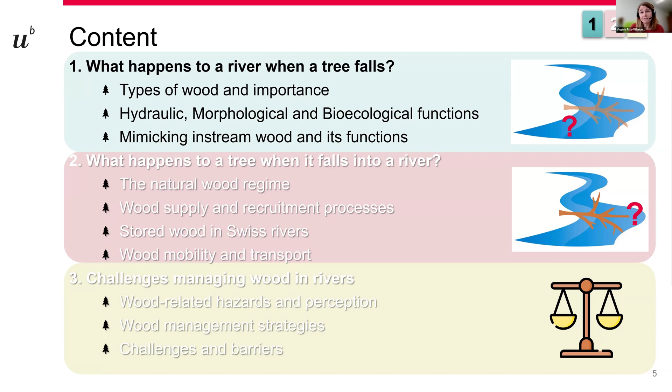Let's start with the first question: what happens to the rivers? Before I start describing the effects of wood in rivers, I was positively surprised by the responses to the first question of the questionnaire. We asked you to picture a river and whether it had wood in it or not. Most of those who responded—by the time I prepared this presentation it was 84 people, though I know more people responded afterwards, so we will update the responses—in any case, most of you pictured rivers with wood.

It was also interesting to see that most of you agreed on the statement that rivers with wood are more natural than rivers without wood.

I was surprised because when you search for 'river' on the internet, all the pictures that appear, or most of them, completely lack wood. So wood is absolutely absent from the general picture of rivers, and the same happens if you search for mountain rivers. Nowadays we need to ask also the artificial intelligence, and again, if you ask it to design a picture of a river, it's really hard to get images of rivers with wood. You really need to be very specific about what you mean by a river with wood—by default, rivers do not have any wood.

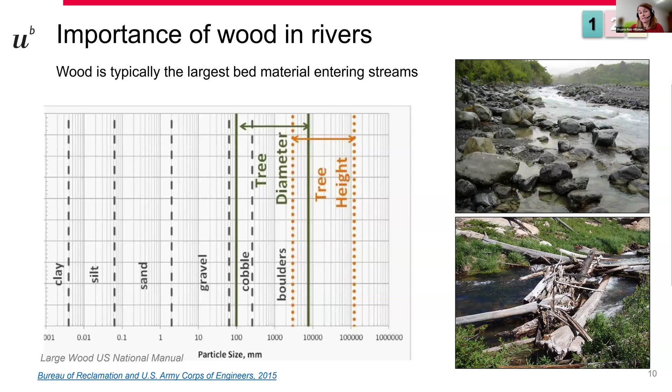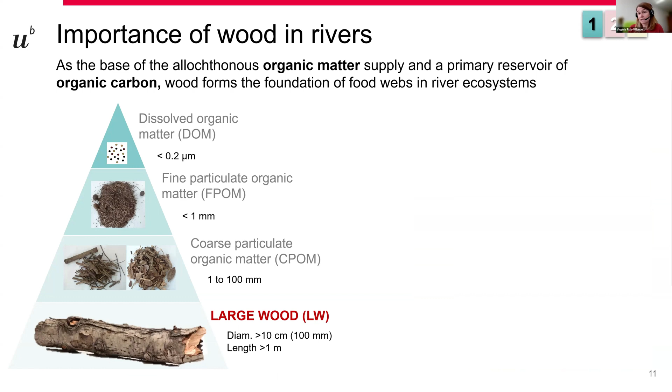Wood is typically the largest material entering rivers, usually larger than the coarse sediment, even boulders, especially when the wood accumulates into jams. In addition, wood is an important element because it's the base of the organic matter pyramid in aquatic ecosystems, and it's also a very important reservoir of organic carbon. Together with living trees, wood stores organic carbon, and this is the foundation of the food web in river ecosystems.

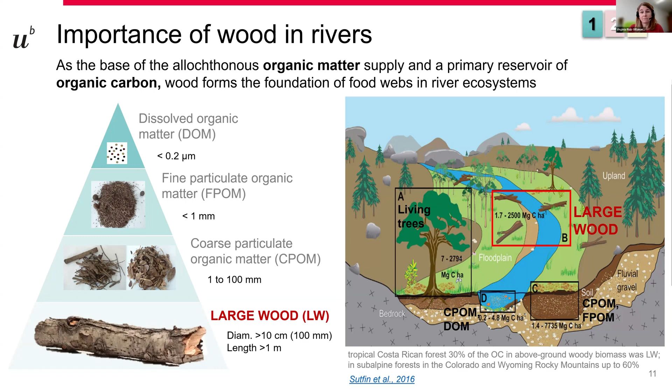Wood provides multiple functions and services across temporal and spatial scales. The local effects at the in-channel scale drive river reach pattern changes, and these changes influence river processes at the catchment scale. So wood influences river hydrology, geomorphology, and ecology.

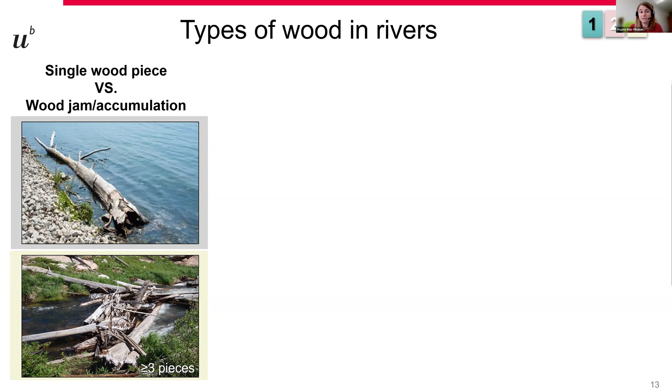We also need to distinguish the effect of wood depending on its size or type. Here we can distinguish between single wood pieces, single elements, and wood jams or wood accumulations, and also whether these accumulations span the whole channel or accumulate on one side—channel-spanning versus non-spanning wood accumulations.

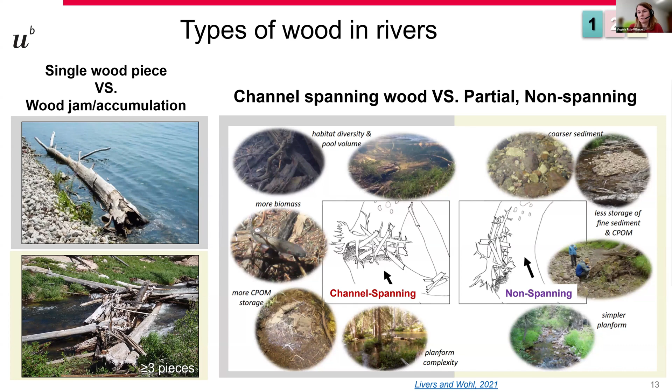We need also to distinguish between stationary wood and mobile wood, and this depends on the time that the wood remains stable in the river. Most research on wood has focused only or mostly on stationary wood, and it's only recently that the benefits of mobile wood have been described. I will go back to this later.

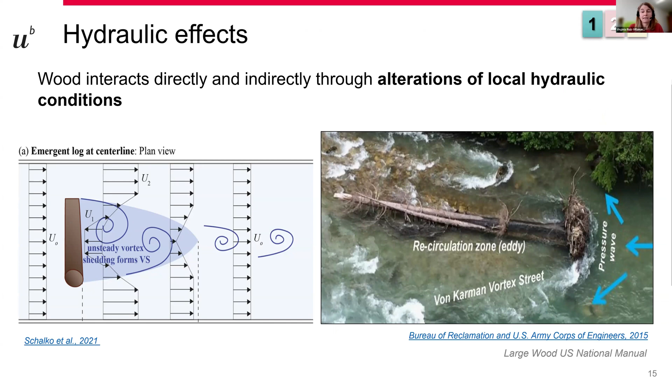Now let's see what are the effects of wood in rivers. The first type of effects are on the hydraulics. The wood forms an obstacle, and this obstacle creates an obstruction to the flow that alters the local hydraulic conditions, modifying the streamlines and increasing turbulence.

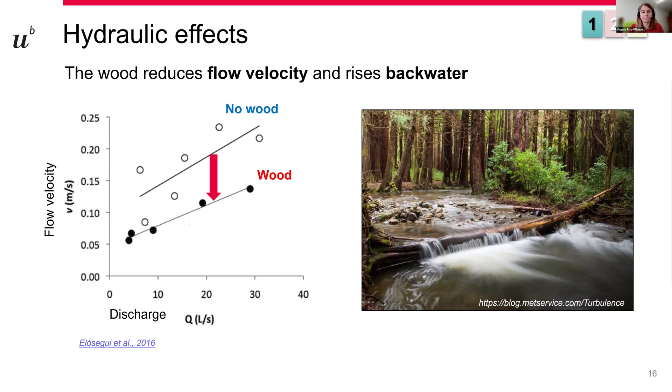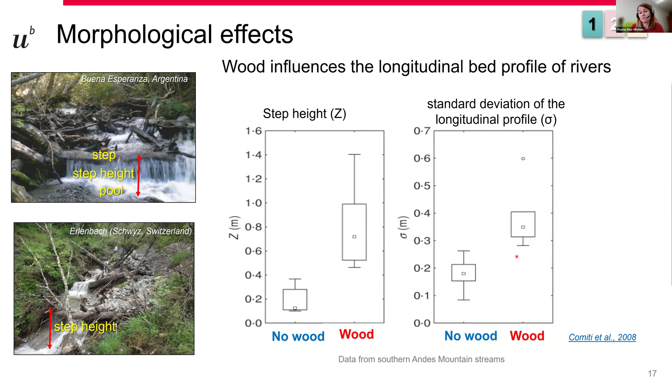These steps modify the longitudinal profile and the slope of the river, so the standard deviation or the variability of this longitudinal profile is also larger.

But not only steps, wood also creates pools. In this example from Spain, where they reintroduced wood, they observed an increase in the number of pools and also in the variety of these pools after just a couple of years from the reintroduction.

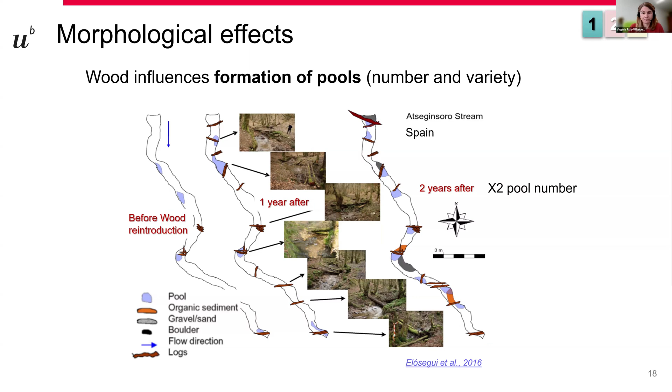The reduction in the flow velocity results in a reduction also of the flow transport capacity, so this causes the deposition of sediment. There is a positive relationship between the amount of wood in a river and the volume of sediment—the more wood, the more sediment the river is able to store.

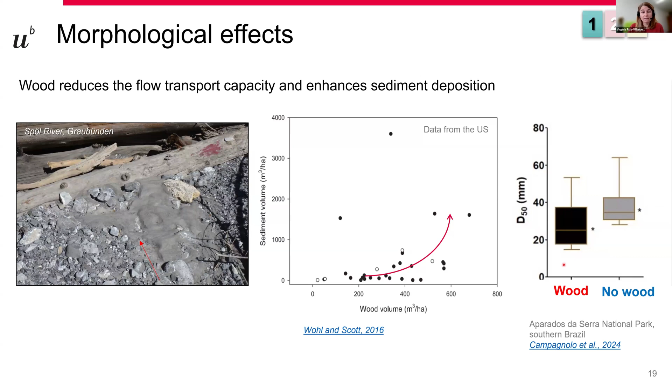Not only the amount of sediment that is retained because of the wood, but also the grain size is affected by the presence of wood. The wood accumulations retain finer sediment, which is shown in this graph, finer sediment that otherwise would be washed away—so fining the sediment grain size.

Although wood may protect from bank erosion, usually spanning wood jams can also enhance channel widening. This is because the accumulation of sediment causes aggradation, or the vertical increase in the channel bed, and this causes lateral erosion or channel widening.

As you can see in this graph, where we have channel width versus the distance along the river, these peaks where channel width is much wider correspond to places where there are wood jams.

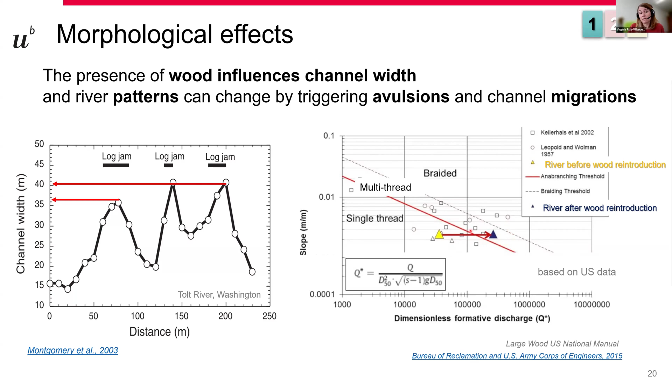These local changes at the river scale may affect the morphology of the river. In this graph, they show that after the reintroduction of wood, the morphology of the river changed from single thread to almost a braided system or a multi-thread channel.

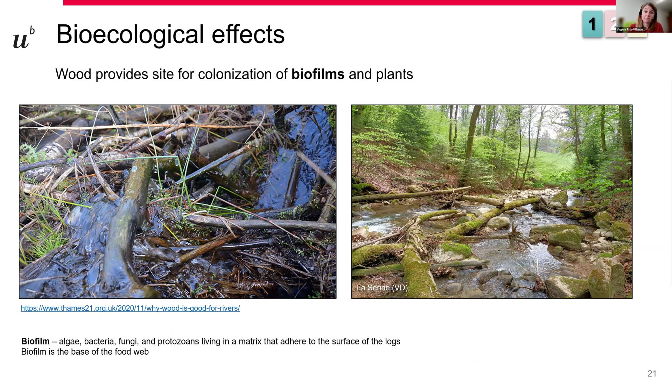Wood also provides a hard substrate for the biofilm to colonize, and the biofilm is very important because it's the base of the food web.

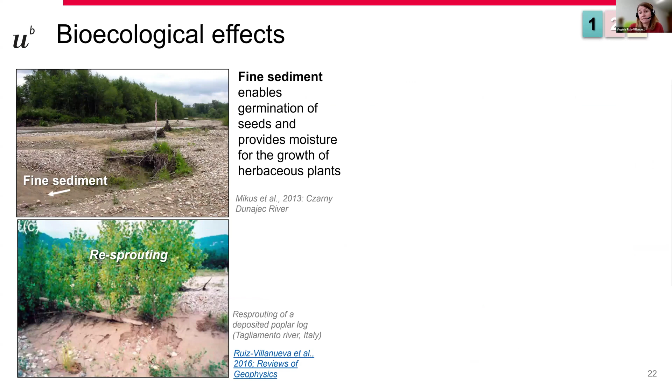But also because of the fine sediment, this enhances or improves the conditions for the seeds and provide moisture for the growth of plants. Wood accumulations and the trapped sediment may force the establishment and development of vegetation and accelerates the process of island formation and evolution.

It's not only because of the sediment and the conditions, the moisture, it's also because some species, like poplar, may resprout even after being eroded and transported long distances.

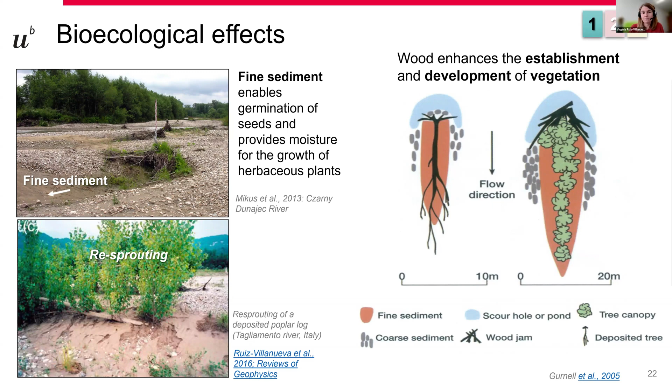So the interaction between flow, sediment, and wood produces in general better conditions for many species, macroinvertebrates and fishes, and enhances the habitat diversity and suitability.

Wood supplies food, shelter, and spawning areas for fish and other species. In summary, wood influences the entire food web, improving the river's biological and ecological diversity.

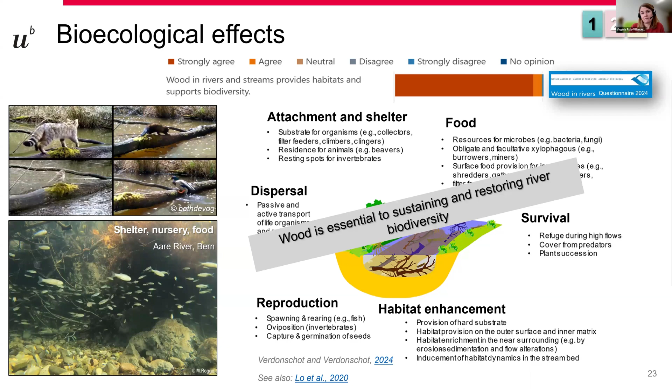Still, wood is very often removed from rivers, so it is important to remind what happens when we remove wood from rivers. By removing wood, we increase flow velocity and transport capacity, we decrease sediment and organic matter deposition, we enhance channel incision and erosion, simplify and homogenize morphology, we lower habitat suitability, availability, and diversity. So we lower biodiversity and ecological integrity, in the end, lowering resilience.

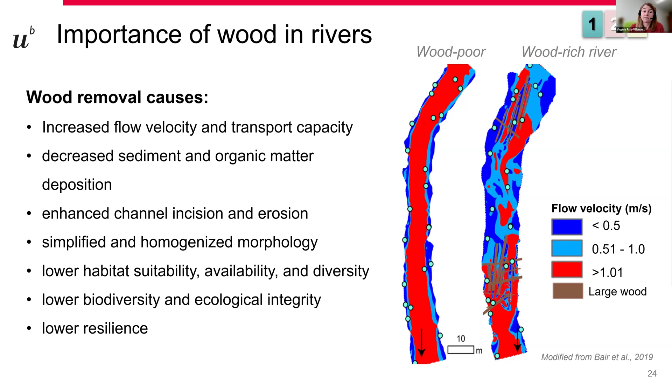So what type of wood is used in restoration? Here we need to distinguish between artificial fixed anchored wood structures - among them simple deflector-like structures versus more complex engineered log jams - versus mobile natural-like wood with limited anchoring. While in principle using non-fixed natural-like wood structures may result in more natural channel features, and this would actually result in more sustainable river management, because they mimic better the natural wood in rivers.

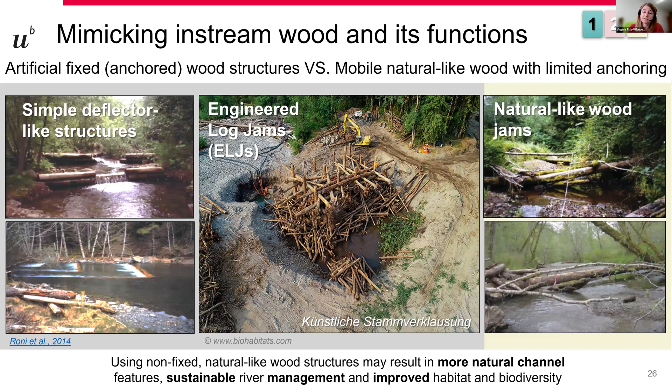Usually anchored structures are used, and this is because the major concern when using wood in rivers is stability and structure failure. However, the few studies that looked and quantified the structure stability have reported very low structural failure rates.

In this example from the US, they quantified failure, or characterized failure, as the structure moving from its original location and losing its function. From the graph, you can see that the reported failure rates were generally very low, with a mean and average value below 30%, and only few of them reported very high percentage failure rates.

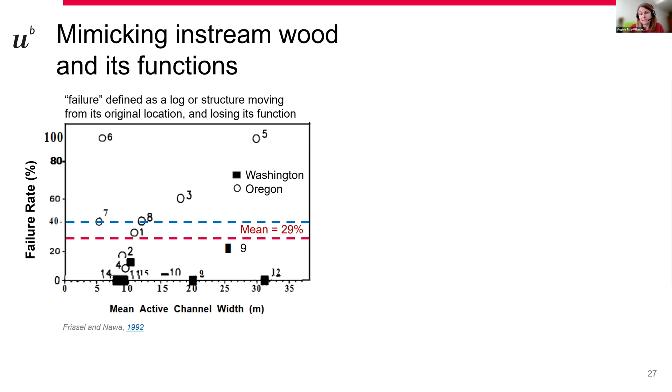In another, more recent example from Australia, where they reported failure rates over time, they also observed relatively low rates - moderate or major failures for a very small percentage of the structures being monitored. Even after 10 to 15 years, the percentage was still below 30%. They also quantified the decay of the structures, and again, most of them presented very low decay.

But studies like these are very rare, so monitoring the structures after installation and reporting failures is really important to assess and quantify these failures.

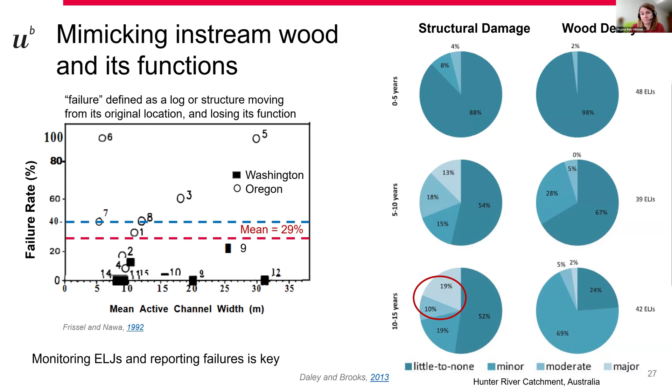In any case, wood is not supposed to be stable in rivers. Wood moves, and having mobile wood is also very important as it provides additional benefits. For example, it provides a mechanism of dispersion and refugia, as you could see in the video.

This is an example from a log right after a flood in the Spol River in Graubünden, and you could see many small animals moving. These organisms survived the flood because they were attached to the wood, and they were also dispersed and transported with it.

So mobile wood provides additional benefits like dispersal and refugia, but also dissipates flow energy, and the transported wood replenishes the large wood downstream. The motion of wood also creates more diversified wood in the river and allows for wood continuity, which is a topic that still remains to be defined and explored.

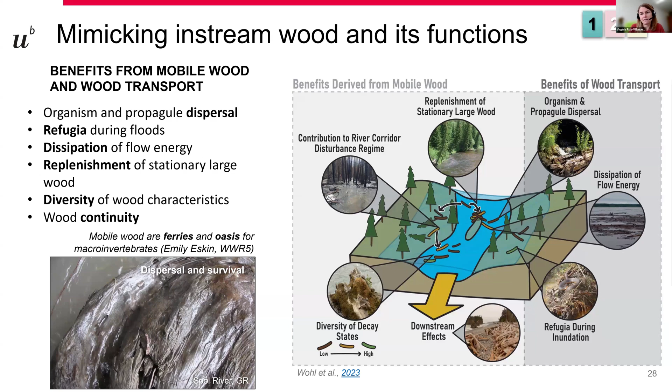So the next part of the talk is about mobile wood and wood dynamics. To define wood dynamics, we recently defined the natural wood regime in a similar way that the flow and sediment regime have been defined. Together, the three regimes regulate the river's physical and ecological functions.

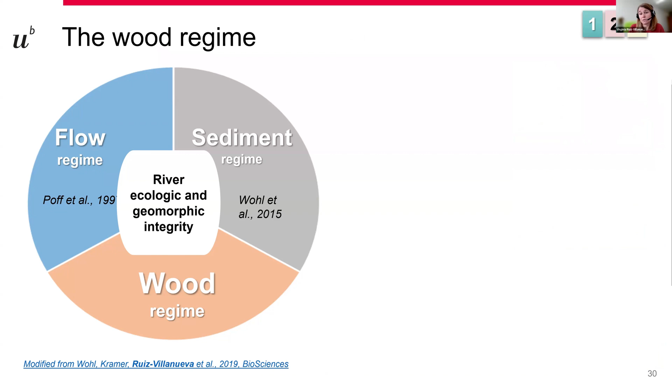Like the flow and sediment regimes, the wood regime consists of wood supply, transport, and storage, and they can be characterized in terms of frequency, magnitude, and timing. But unlike the flow and sediment regime, much less is known about the natural wood regime, and only a few sites have been monitored. The wood regime has been quantified only partially, and in most cases only single aspects of the wood regime are explored.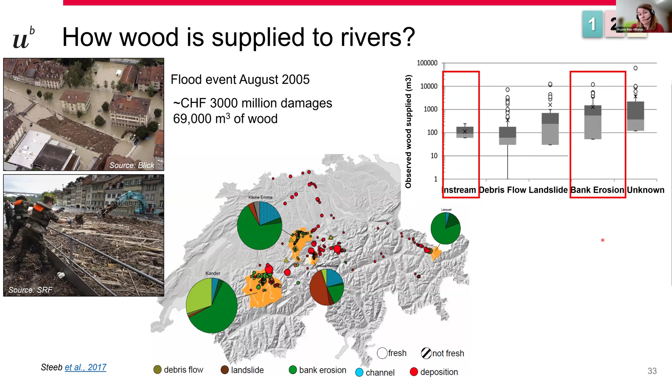So here you have the wood supplied for different processes and also the wood that was in the river. This is the first interesting observation: the wood in the river was very small compared to the wood supplied during the event by other processes. Among the different processes, bank erosion was the most relevant one, especially in larger catchments.

This is what we wanted to explore in this other study, where we applied a GIS model to 40 catchments in Switzerland. In this graph you see the results in terms of the contributions, or the percentage of wood volume, of each process. We considered landslides, debris flows, and bank erosion, and in orange we estimated the amount of wood in the river.

Again you see that this is a very small percentage. For a frequent scenario of low magnitude events, you see the green color is dominant in this graph, meaning that the most relevant process is bank erosion, especially in large catchments. Here you have a set of catchments from very small ones to large rivers.

And in a rare scenario, or higher magnitude scenario, the importance of landslides and debris flow changes, especially in small catchments, but still in the larger rivers, bank erosion is the dominant process.

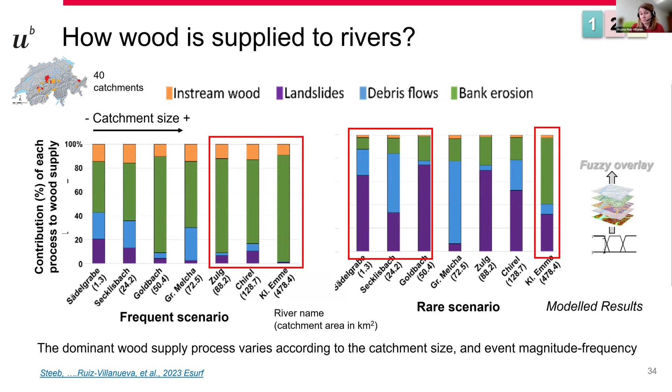So these, of course, were model results. And when we compared these to observations, we saw that there was a large discrepancy, or the largest errors in this graph - they are represented by the size of the marker - for the larger catchments. This is because the model computes all the areas prone to these processes, to landslides, debris flow, and bank erosion, while during an event only part of the catchment will be active or affected and contributing with wood.

So that's the key challenge here: to identify which parts of the catchment, which torrents, which parts of the river will be affected by these processes.

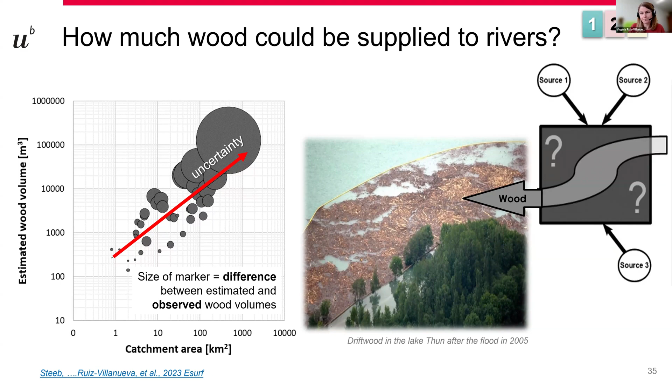So the second element of the wood regime is the wood storage or load, which is usually computed in terms of volume per surface, per area, or per longitudinal distance. Again, it can be defined in terms of magnitude, frequency, and duration, because storage is not constant - it changes through time.

This graph shows you a theoretical example of a river which shows a significant increase in wood storage after a debris flow, and then the wood storage decreases through time because of the transport during low flood magnitude events.

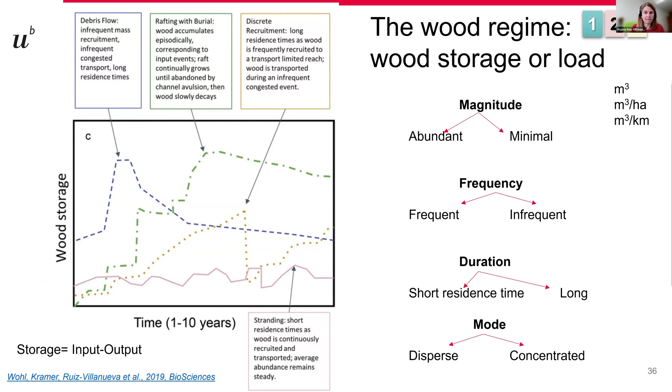But wood storage also changes in space, not only in time, and the mode the wood is stored also changes according to the river morphology. So we usually have more dispersed, scattered wood accumulations on braided multi-thread channels, while we have more aggregated wood accumulations, so wood jams, towards meandering rivers.

And there might be different types of accumulations that have been classified by some researchers. So in meandering rivers, we have jam accumulations usually on the concave banks and the point bars.

But where the wood is stored is also changing depending on the discharge. So in this study we computed the depositional probabilities using numerical modeling for different flood scenarios, and you see that the areas more prone to accumulate wood change between the different scenarios.

And what we observed is that during extreme flood scenarios, the floodplain is the natural depositional zone. What happens nowadays is that the disconnection between the river and the floodplains limits the deposition of wood and enhances its transfer downstream.

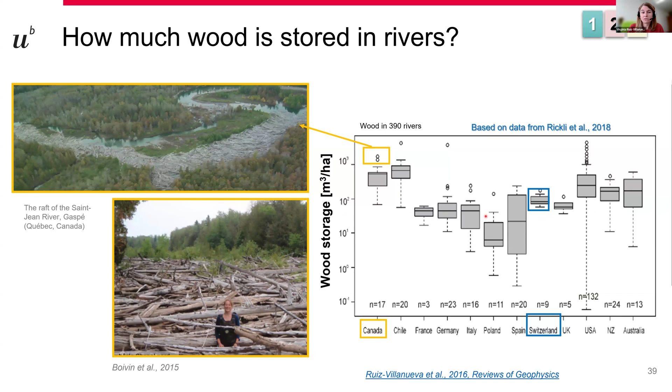And by the time we did this review, we had only a few streams from Switzerland, and as you can see, the amount of wood actually was comparable to the amount of wood in other rivers.

So we wanted to update this data, and we compiled data from other rivers, also expanding a bit the type of rivers, because this first data set here illustrated by the blue dots were generally very small rivers. So here we have wood load versus drainage area. And then we expanded to look into wood storage in larger rivers.

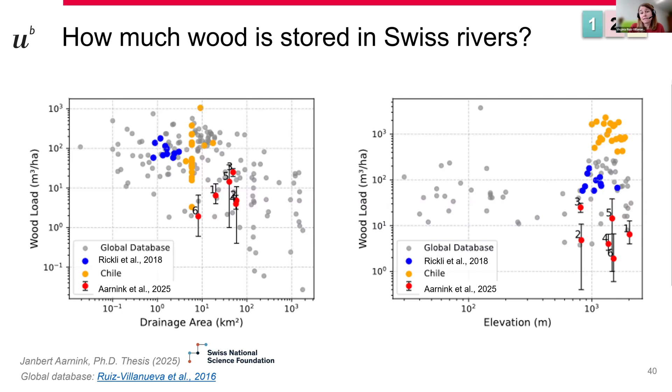And what we saw is that the points lie on the lower part of the graph. But in all cases, we remain in the mountain area. So here you have again wood load versus elevation. And then we compare with this global database that we reviewed a few years ago. So this agrees with the general perception, shown also by the questionnaire, that rivers in Switzerland, or in general, have reduced quantities of wood.

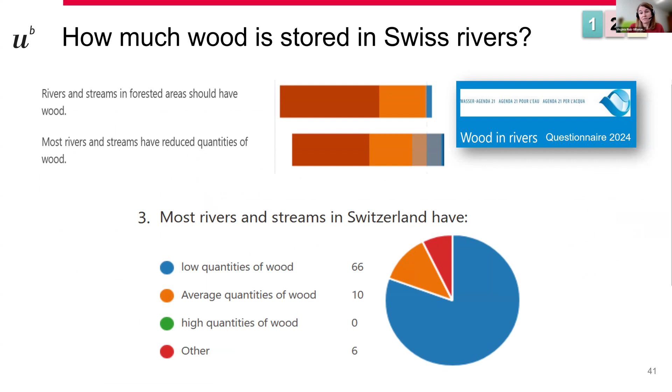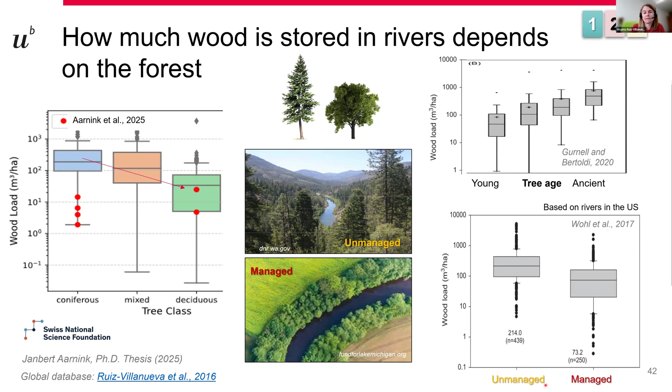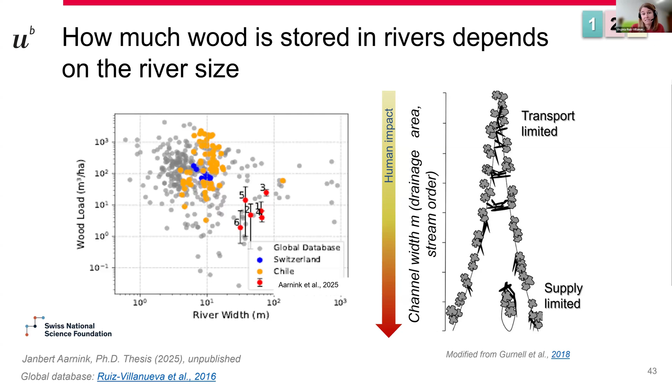So this part of the river network has a higher transport capacity, but may receive less amount of wood. However, we need to consider that the influence of humans and the human pressure also increases in the same direction. So we cannot disentangle the trend from the management. But in general...

Wood also remains longer in rivers crossing conifer forest compared to deciduous or broadleaf trees. This is because of the decay, the wood decomposition, which is slower in the case of conifers and faster in the case of broadleaf trees. And the decay, or the residence time of wood in the river, depends on many factors, not only the species, but also the wood characteristics, the flow regime, etc.

The next element of the wood regime is wood transport. So like sediment, wood is mobilized in rivers during floods. Again, this is changing through time, and transport is highly variable. But the main challenge here is the lack of observations compared to sediment, for example. There are only a few rivers being monitored worldwide.

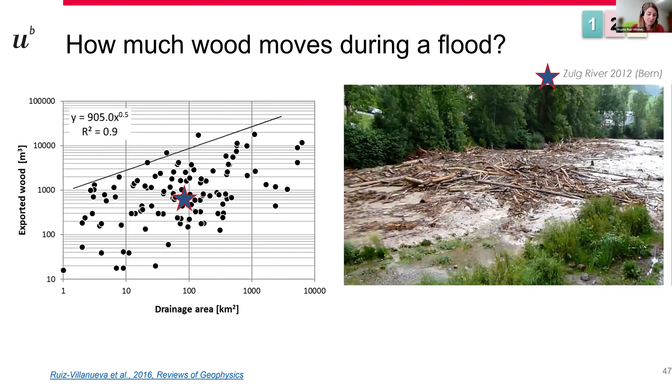But the important question here is how much can be mobilized during a flood. This is a video I always show from the Zulg River, because it's a very interesting river. In this review we did a few years ago, we compiled the volume of wood exported or transported during a flood versus the catchment area. What we see is that for the same river, the amount of wood transported during a flood is really variable. This is exactly what we see in the Zulg River, where this type of wood-laden flood is quite frequent.

So here what is important is the flood history, but most important is the wood availability - how much wood is in the river when the flood arrives.

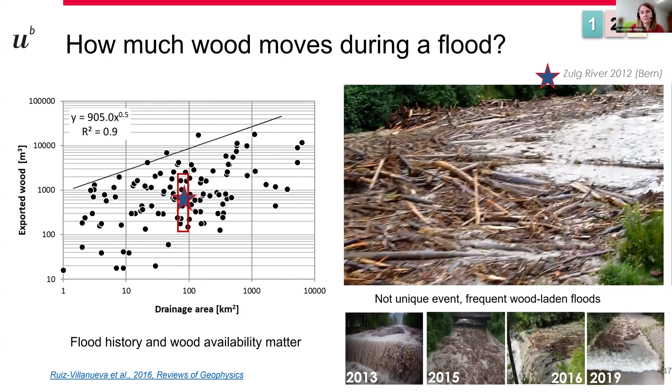But how much wood is moving in terms of in-stream wood? As I said, there are only a few sites where wood is being monitored. In this graph you see the data from these sites where wood is actually tracked and tagged and followed before and after floods. Some of these rivers have been monitored for years.

So here you see the proportion, the percentage of wood pieces moving for the entire survey period. What we see is that the percentage of mobile wood is relatively low - in most cases it's below 20%.

This river in the UK showed relatively larger mobility, but note the number of pieces tracked, and that they were tracked during a very short time. In other cases, thousands of pieces and observations have been compiled. So yes, wood moves, but maybe not that often and not that much.

What are the factors controlling wood mobility? The first is the size of the wood. There is a good proxy to estimate the likelihood of movement: the length of the wood relative to the channel width, but also the diameter relative to the water depth, as this controls buoyancy.

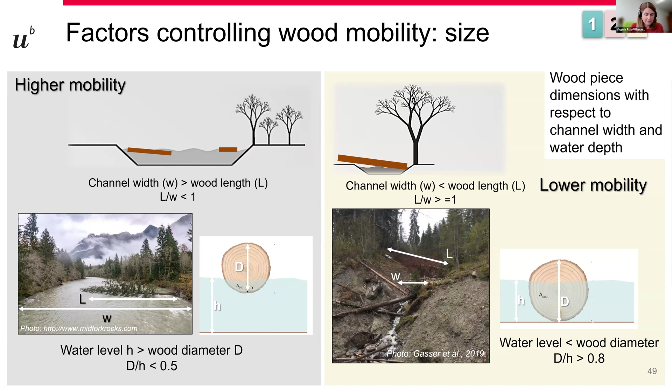In general, larger rivers show higher wood mobility, while small streams are characterized by lower mobility. How the size of the wood changes through time is also important because this affects transport, and there are very few studies which looked at this topic.

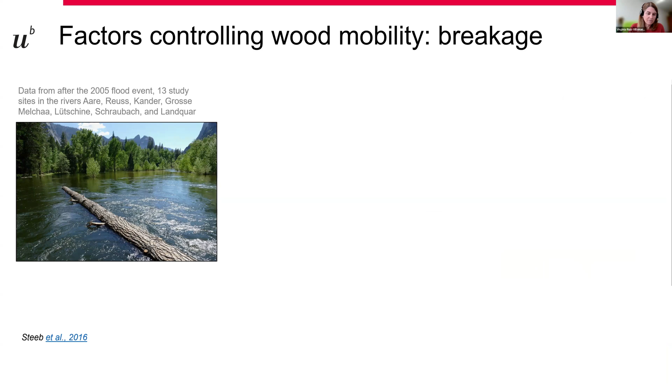The first thing is how different the size of the wood is once it arrives to the river. After the flood in 2005, a study from different catchments in Switzerland compared the size of the wood in rivers versus living trees, using data from the forest inventory. What they observed is that wood in the channel reduced on average to 20% of the original tree height.

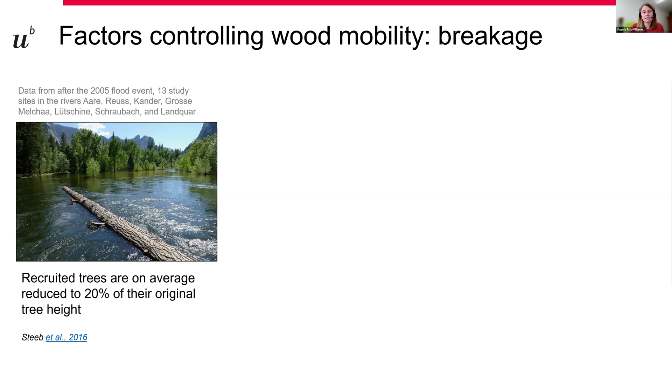Once the wood is in the river, the first thing that happens is a reduction in branching complexity - the trees first lose their branches, and this happens quite fast. In a study in France, they observed that most branches are lost within 2 years, even without transport. The pieces remain stable, but the branches continue to be fragmented.

Once in the river, fragmentation - changes in length - also happens very slowly. At two sites in Chile, we observed that most pieces reduce their length less than 30%, and only a few reduced significantly in size after more than 7 years. That's important because smaller pieces are entrained more easily and travel longer distances.

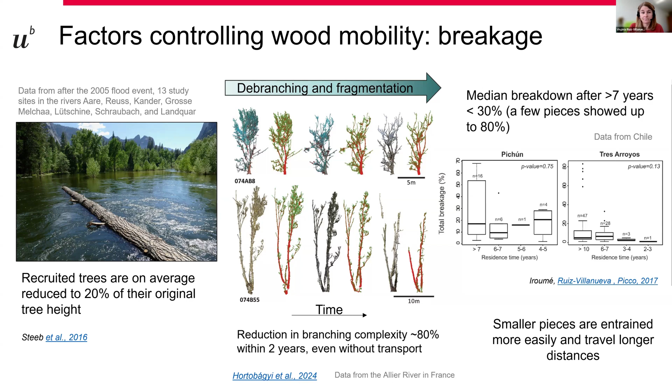What's interesting here, in this example from Chile but also seen in many Swiss rivers, is that the proportion of wood with roots is very low compared to the total amount of wood in a river. That's notable because in many restoration projects, the most frequent element used is roots.

Another aspect to consider is the density of the wood, because this controls buoyancy and affects transport. Wood in a river usually shows a smaller or lighter density than living trees, and because of decay or decomposition, biochemical processes, the density is reduced through time, which again affects transport.

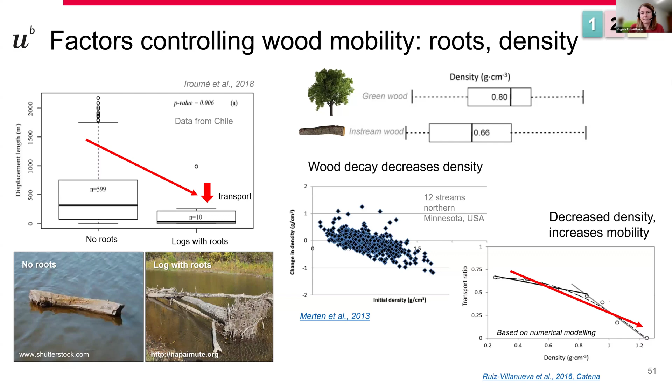But not only the wood - the river itself also controls mobility. The morphology is very important. We saw this in a study where we applied numerical modeling and compared observations from two different river reaches: one channelized, straight, relatively narrow channel, versus a very wide, natural, braided river reach. In this graph you see the transport ratio - the percentage of wood pieces being transported through these reaches.

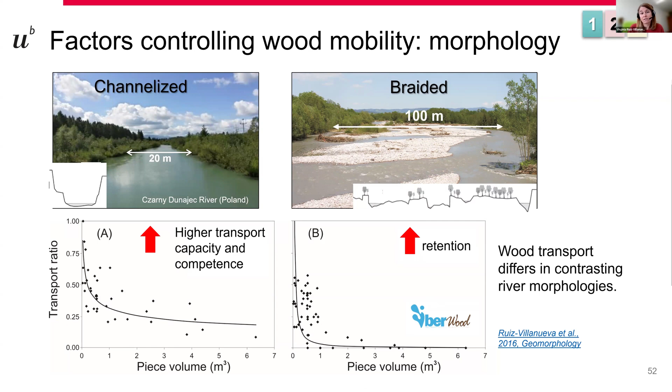The first observation is that straight channelized reaches have larger or higher transport ratios, but also the transport competence - the size of wood the flow is able to transport - is much larger in this channelized system. So by channelizing rivers, we increase the transport capacity and competence, moving more wood and artificially increasing wood transport. Braided systems, like this one, are the natural retention zones of rivers.

The next question is how far the wood travels. From the few studies that monitored wood, we compiled the observed transport distances, and what you see is that wood usually travels shorter distances.

So traveling distances longer than 1 kilometer has a very low probability. And when the wood moves during a flood is also very relevant for management.

So many interesting things we can see here. The first one is that the peak of the wood flux or wood transport happens before or during the peak of the flood, and then during the falling limb, wood transport is very low. Another interesting thing is that the second flood showed much lower wood transport, even though the discharge was much larger.

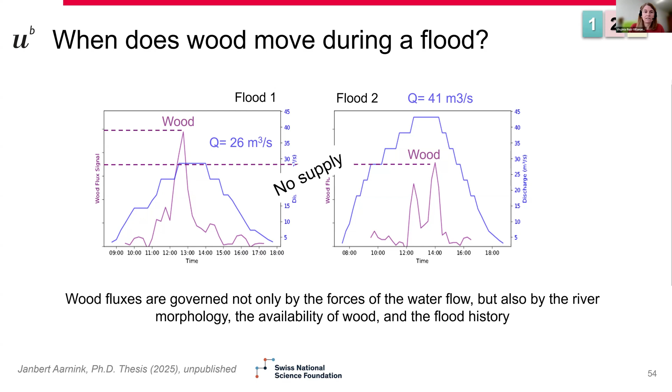This is because there was no supply in between - most of the wood that was in the river was already transported during the first flood. So this also illustrates that wood fluxes are not only governed by the forces of the water, but the availability of wood, the flood history, and the river morphology are also important.

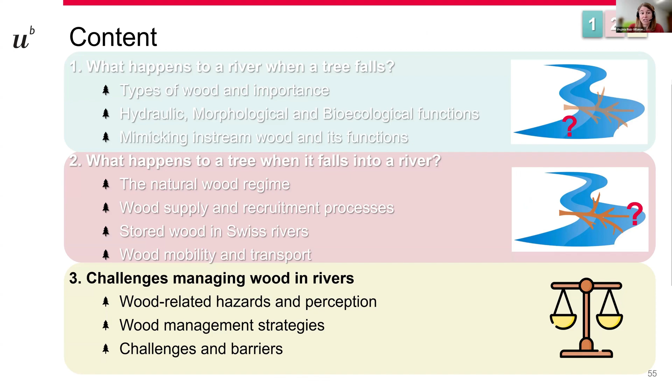So we entered the last part of the presentation about the challenges managing wood in rivers. The main challenge is the potential hazards. The transported wood may accumulate at critical sections like bridges, like this case in New Zealand, and this increases the impacts of flooding.

This is the same for bridges, but also dams and other infrastructures. What is important to stress here is that those dangers or hazards related to the transport of wood are not posed by the wood itself, but are the consequence of the obstacles and infrastructures that were not designed to allow the wood to pass.

This is a legacy effect on wood in rivers because we artificially increase the trapping efficiency of rivers. On one hand, we artificially increase the transport capacity. On the other hand, we artificially increase the trapping efficiency.

Still, images like this can lead to very drastic management actions, like removing most of the wood along a river, usually without considering the impact, and they also create this generalized negative perception of wood.

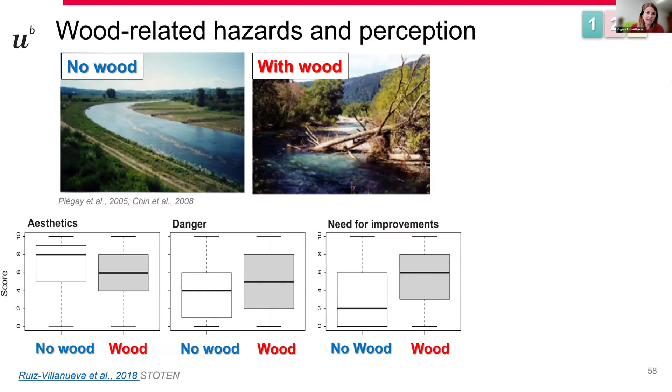There were in total 20 pictures, 10 with wood, 10 without wood. In general, all the pictures with wood were rated as less aesthetically pleasant, more dangerous, and with a need for improvement.

And when we asked what type of danger they expected, most of them reported flooding, and also what type of improvement they would consider - in most cases, they answered channel cleaning. By cleaning, they meant removing wood.

This contrasts quite a lot with the results of the questionnaire, and this is also interesting. While most respondents strongly disagreed with the statement that rivers with wood are less aesthetically pleasant than rivers without wood, there was less consensus about rivers with wood being more dangerous, but it was again unanimous that removing wood from rivers mitigates flood hazards.

So we need to understand what the hazards related to wood are and quantify them when possible. The consequences of the deposition of wood at bridges are the reduction of the channel cross-sectional area, the backwater, and in some cases, the flooding of nearby areas.

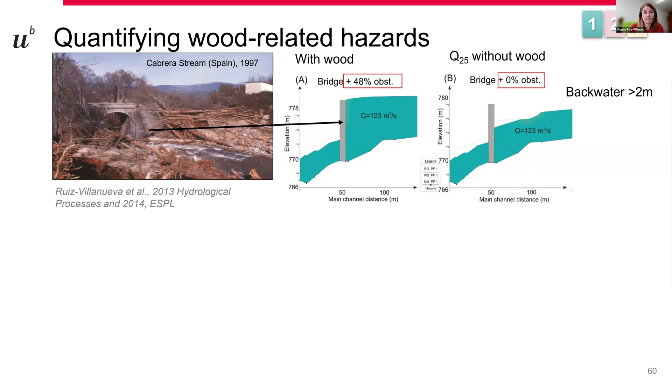This is an example from Spain where this bridge was blocked with wood, causing a backwater of 2 meters. And this, of course, is the difference.

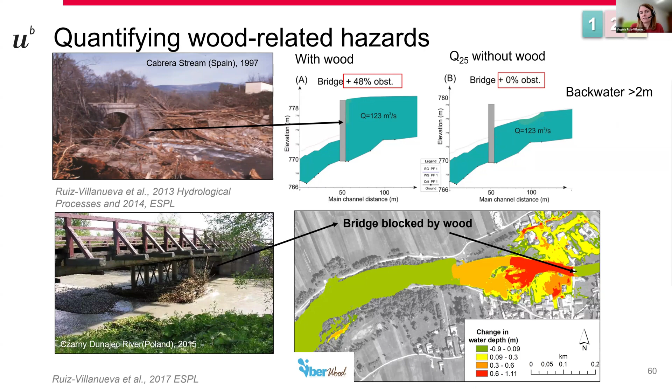This is another example from Poland, but it shows a similar case - this bridge being blocked, causing the flooding of the town nearby.

Again, it's important to identify what are the factors controlling bridge clogging or blockage. On one hand is the wood, but also the flow conditions, the river morphology, and the bridge geometry.

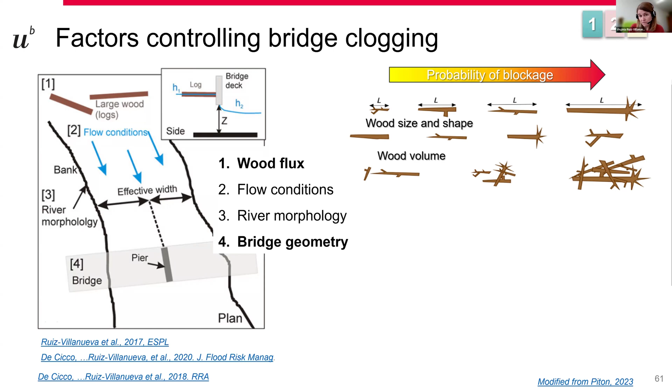The probability of blockage usually increases as the size of the wood and the complexity of the wood increases, and also the volume, but also changes according to the bridge dimensions - the geometry and span, the presence of piers and the shape of the piers, and the deck or freeboard.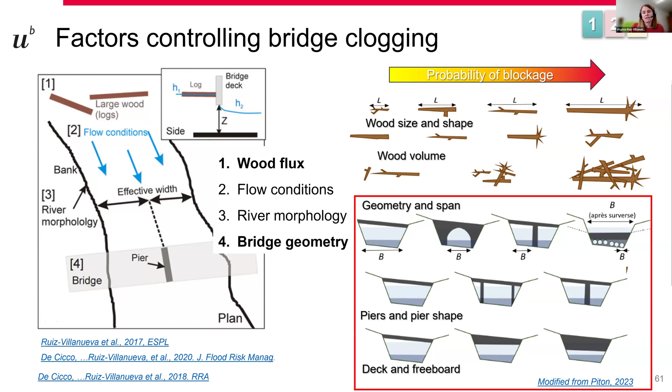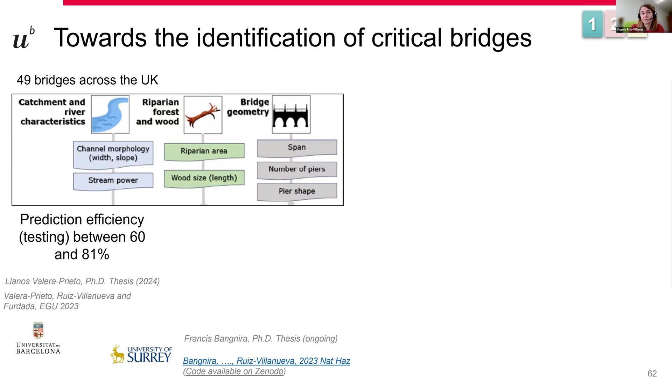So as the only artificial element in rivers, here we should focus on the bridges and not that much on the wood. So this is what we did in this work. We compiled variables that are easily accessible in any river, and using a database from bridges in the UK, we trained a decision tree that is able to identify bridges that might be prone to trapping wood and bridges that might be less likely to trap wood.

The algorithm trained in the UK showed a performance of 60%, but we did a test with this algorithm in Spain and showed a higher performance, and the combination of the two showed up to 80%. So 80% of the bridges that actually had problems with wood were identified by the algorithm.

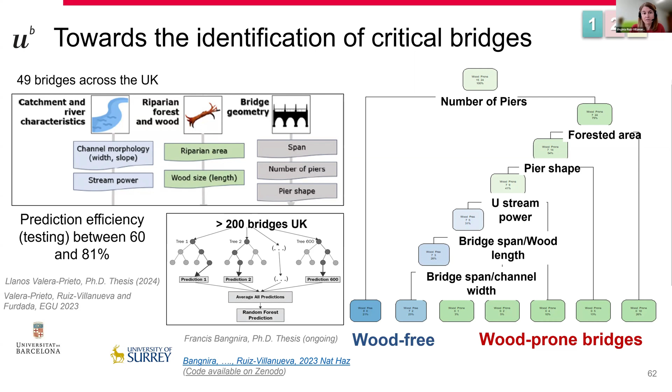Currently we are training a more complex model, a random forest, with a much larger database. So once the critical bridges are identified, the next step would be to evaluate and make a cost-benefit analysis comparing different strategies. But this is very rarely done. Actually, this is the only, or at least one of the few studies that exist, and it comes from the US.

And here they compared 3 different management scenarios. One in which wood is being removed periodically from the river to avoid a bridge getting blocked. Another scenario in which wood is not removed, but the wood that arrives at the bridge is removed and the infrastructure is maintained. And then the third scenario, the third strategy, was to leave the wood in the river and modify and adapt the structure, the bridge, to allow the wood to pass.

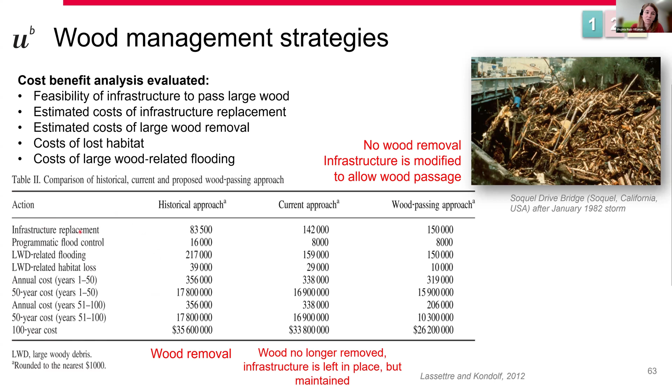Then they quantified different aspects in economic terms. And what they saw is that this third strategy was actually the best. Not only in absolute numbers, but they also made some estimates through time, and this strategy was also the most sustainable in the long term.

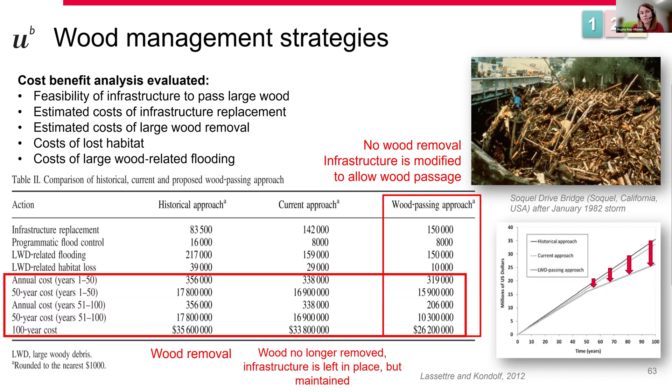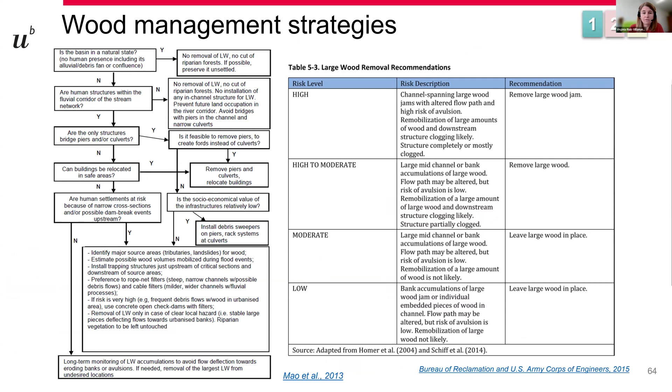So with this in mind, there are a few guidelines that exist to define management strategies, and here I added a couple of examples, one from the US and one from Chile, but I'm not going into details. You will get the PDF and you have all the links in there, or you can ask me afterwards.

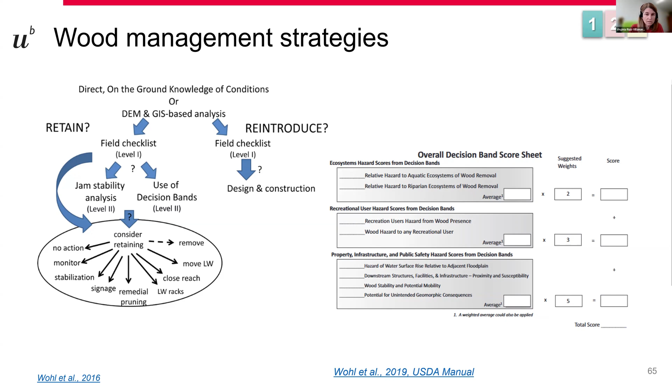The US recently published a manual with a set of checklists and tools. We don't have something like this in Switzerland, but we have this BAFU report published after our wood flow project. In here, we also suggested or proposed some tools and recommendations, but focused on hazards.

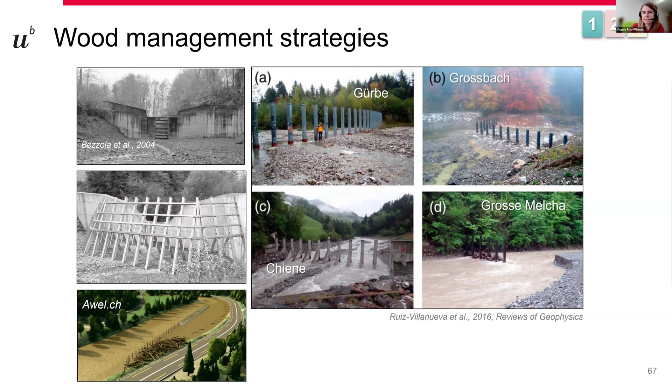Still, in some cases, different structural measures are required, like for example, these retention racks or structures that are quite common in the Alps. But they must be designed very carefully because they may also trigger unexpected side effects, like in this example.

Efficiency of the trapping structure - the structure was well designed, it trapped most of the wood, but then caused significant lateral erosion.

Then if these structures are not an option, the bridges can be adapted and modified. And there are also different ways to do that.

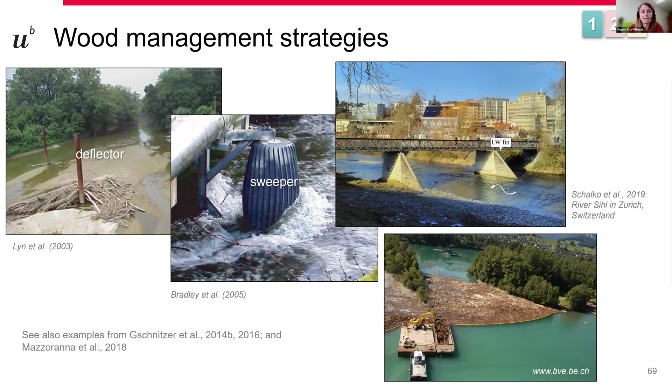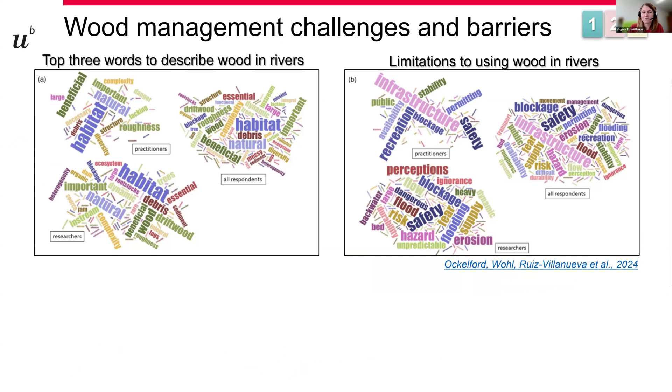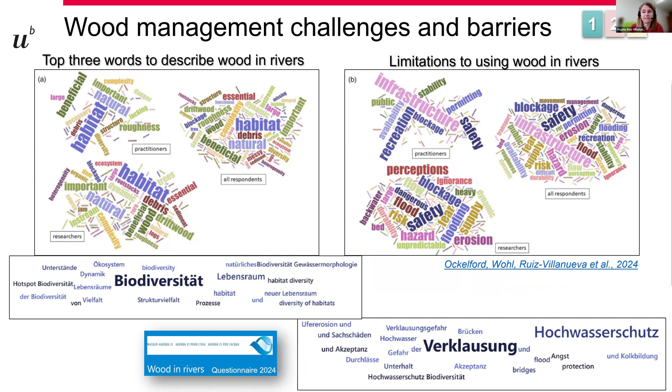But just to finish, we wanted also to identify the still existing challenges and barriers. A couple of years ago, we had a project that focused on this, and we organized a set of workshops bringing together practitioners and scientists discussing these different barriers and challenges. One of the things that was nice to see is that the answers to the questions about the 3 words to define and describe wood in rivers and the limitations were quite similar from those who responded to the questionnaire. So wood is related to biodiversity and habitat, but also with blockage, infrastructure, and flooding.

Out of these 3 workshops that we organized in different countries, here I listed the main remaining challenges that were identified, and I would like to discuss this also with you today, because there might be specific challenges in Switzerland or different ones. But in general, these are the most relevant.

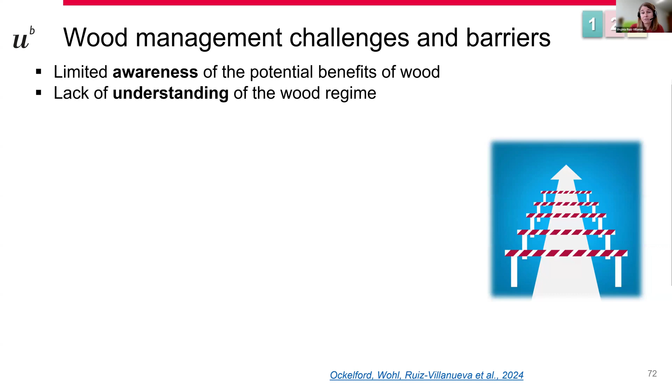So: limited awareness of the potential benefits of wood, lack of understanding of the wood regime, lack of good technical guidance on how to include large wood, lack of monitoring, lack of a sound and robust evaluation. Communication was also raised as an important aspect. Inappropriate location or design when referring to structures, lack of suitable wood, site constraints in terms of, for example, the presence of vulnerable infrastructures. And then, of course, uncertainties associated with wood, which are more challenging to model or predict than for more traditional structures.

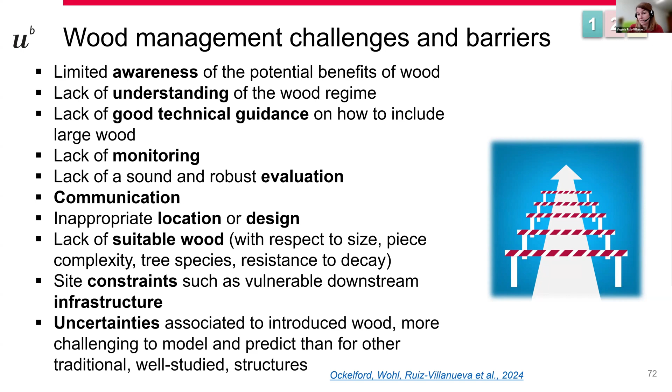So I would be happy to discuss the challenges and barriers that you face here in Switzerland when working with wood in rivers. And with this, I took a bit longer, but I thank you for your attention and will be happy to answer questions.